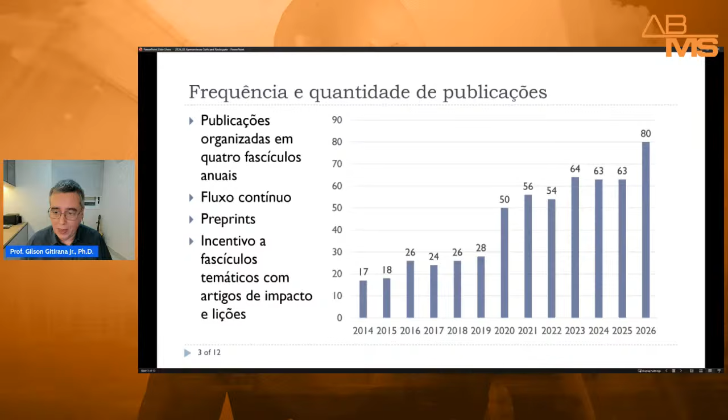E a revista tem incentivado a proposição de fascículos temáticos com artigos de impacto e sempre publicações de destaque, como as lectures tradicionais. Em termos de indexação, a Soils and Rocks tem indexação na Scopus, no Clarivate, na Web of Science, no Google Scholar, na CNKI, que é uma base de dados importante da China. Então, ela está presente nos principais indexadores.

Isso significa que não apenas a Soils and Rocks tem um fator de impacto quantificado. Significa também que quando um autor publica o seu artigo na Soils and Rocks e faz a citação a outros artigos de outras revistas, essas citações estão sendo registradas e estão aparecendo no fator de impacto das outras revistas e nos fatores H dos autores.

Então, é uma revista que está totalmente inserida na lógica de indexação e rastreabilidade das citações. Falando em como tem evoluído os índices da revista, primeiro, um motivo importante até dessa nossa apresentação hoje é celebrar a evolução em termos de qualis.

A Soils and Rocks tem uma classificação que evoluiu ainda no triênio, na época era triênio, 2010 a 2012. Ela estava na categoria B2, na área de engenharias 1, e B1 na área de geografia. No quadriênio de 13 a 16, ela subiu levemente para B1, que é o terceiro de 8 estratos no sistema daquela época, que tinha A1, A2, e de B1 a B5. E aí no quadriênio seguinte, de 17 a 20, ela teve uma queda. Ela foi classificada na categoria B3, que era o quinto de 8 estratos.

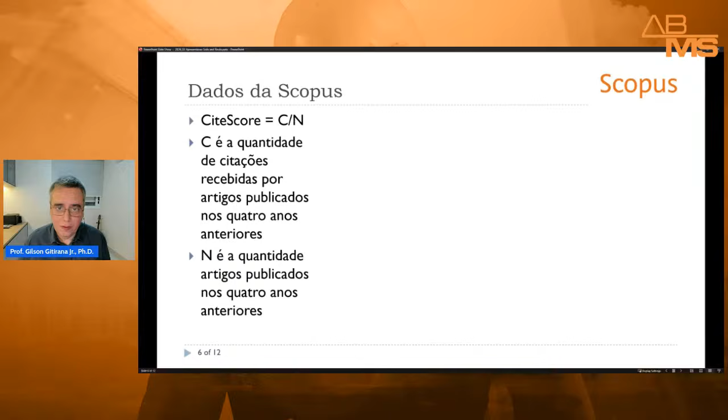Em termos de Scopus, o índice principal é o chamado CiteScore, que é o fator de impacto da Scopus. Esse gráfico mostra como o nosso fator de impacto tem evoluído. Então, a gente teve uma estagnação com fator de impacto realmente baixo até 2022, mas a partir de 23 nós conseguimos fazer esse número crescer. E isso se deve a uma série de modificações nos procedimentos da revista, buscando aperfeiçoamentos que trouxeram esse resultado.

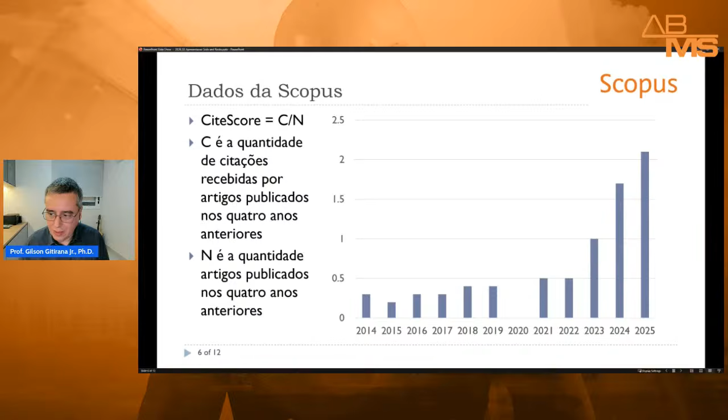Mas o que importa também não é só a evolução do fator de impacto, é a posição da revista quando você compara ela com as mesmas revistas da mesma categoria. No caso da Scopus, a categoria da Soils and Rocks tem o título Engenharia Geotécnica e Geologia de Engenharia.

Mostrando aqui a evolução recente nesses últimos 4 anos. A gente ainda não tem a divulgação final de 2025, mas a gente tem uma prévia. Em 22, a revista estava no 12º percentil, o que certamente era muito aquém do desejado. O percentil da revista é modesto ainda, mas ele tem subido bastante. Então, ele foi ao 22º, 34º, e agora para 2025, com o fator de impacto subindo.

Lembrando, ele agora é previsto ser fechado em 2,1, a gente está com a expectativa de um percentil próximo de 40. Eu diria que internamente a nossa meta é atingir no curto prazo um percentil em torno de 50, que seria já uma evolução bastante importante para a Soils and Rocks.

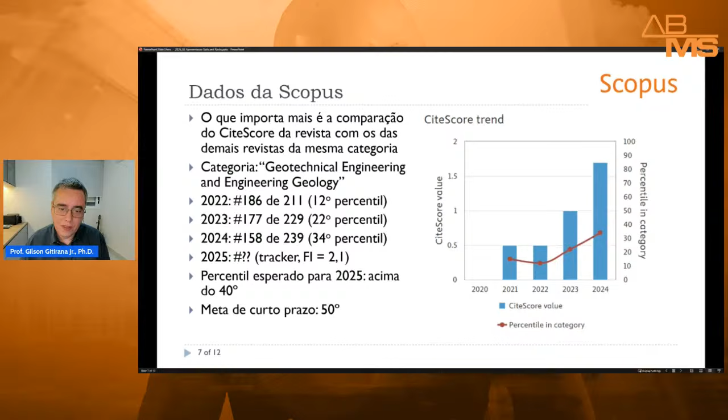Só conectando isso com Qualis, um percentil acima de 50 significa uma revista classificada como A4, independente dela ser nacional ou não. Então, uma revista que está no percentil 50 vira A3, nacional, porque ela está sendo valorizada por ser uma revista de uma associação nacional, ou por ser indexada no Scielo, entre outros critérios.

Falando de Web of Science, Clarivate, o fator de impacto é inferior ao da Scopus, mas também tem evoluído, com uma certa oscilação no índice JCR, como vocês estão vendo aí, de 22, 0,5, 23, 1,1, e 24 a gente oscilou para baixo, e a gente tem tentado diagnosticar e entender por que essa oscilação para baixo, sendo que a gente teve uma melhoria na Scopus, e a gente tem alguns indicativos sobre os motivos.

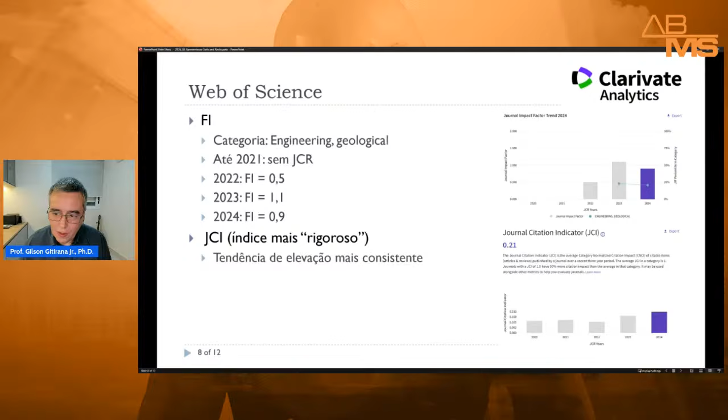O índice JCI, que é o índice que tende a substituir o fator de impacto dentro da Web of Science, porque é um fator mais rigoroso, com outros critérios, esse tem subido de uma maneira mais consistente. Então, ele atualmente está em 0,21, bastante aquém ainda do que a gente deseja, mas a gente tem conseguido fazer ele subir.

Em termos de número de submissões, a gente tem recebido um aumento, o que significa que a revista está despertando mais interesse dos autores. De 24 para 25, por exemplo, a gente teve um aumento de 77% na quantidade de submissões. Isso também se reflete na quantidade de artigos publicados pela revista.

Isso traz para a gente um grande desafio, porque uma quantidade grande de submissões significa muito mais trabalho em termos de conseguir pareceres de qualidade para os artigos, que vão nortear a decisão editorial sobre o aceite ou a rejeição do artigo.

Mesmo com essas dificuldades em quantidade crescente de artigos, a gente tem conseguido manter um tempo de avaliação relativamente curto, quando comparado com outras revistas da nossa área. O tempo médio de avaliação, primeira rodada, em 25, por exemplo, foi de 89 dias. Não é o ideal, o que a gente deseja é que seja mais curto, mas dentro de todo esse contexto de dificuldade de conseguir o trabalho voluntário dos nossos revisores, é o que nós temos conseguido. De maneira geral, ter uma primeira decisão, uma segunda depois de um artigo revisado, e uma decisão final, publicação, editoração, tudo fechando em 6 meses, a gente considera um prazo relativamente muito razoável, comparado com o que é típico dentre revistas semelhantes.

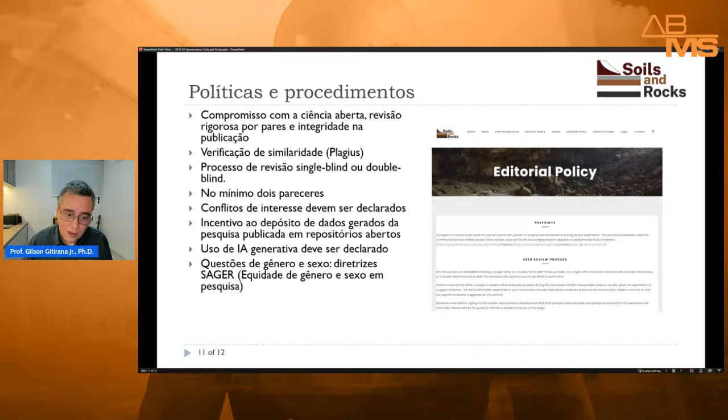Finalmente, observar que a revista também tem uma preocupação com questões de gênero, e segue as diretrizes SAGER de equidade de gênero e sexo em pesquisa. É um grande desafio que nós temos, mas temos tentado ter uma representatividade mais equânime possível, dentro do possível.

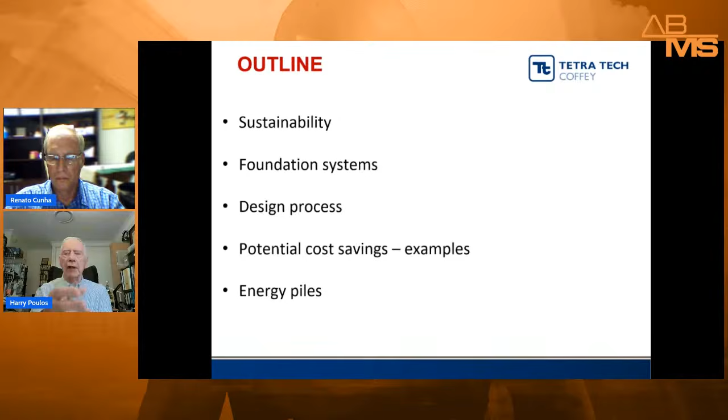I will talk firstly about what sustainability is. Then I'll say something briefly about foundation systems oriented towards sustainability, and about the process of design, and about cost savings because of the focus on sustainability. I'm going to finish up with that of energy piles.

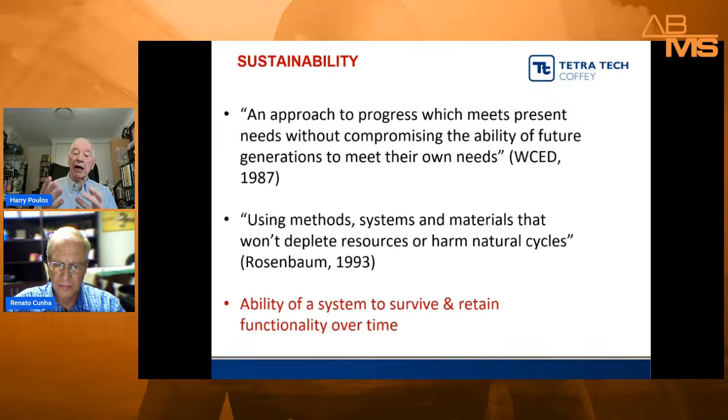Sustainability meets present needs without compromising the ability of future generations to meet their own needs. Another definition is using methods, systems, and materials that won't deplete resources or harm natural cycles. But basically, putting it in simple words, sustainability is the ability of a system to retain its functions over time.

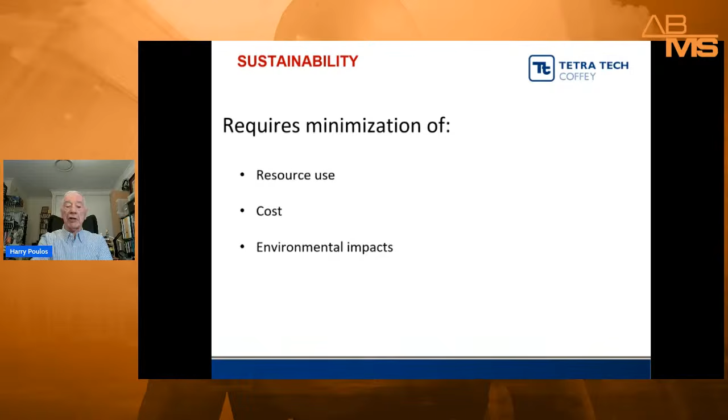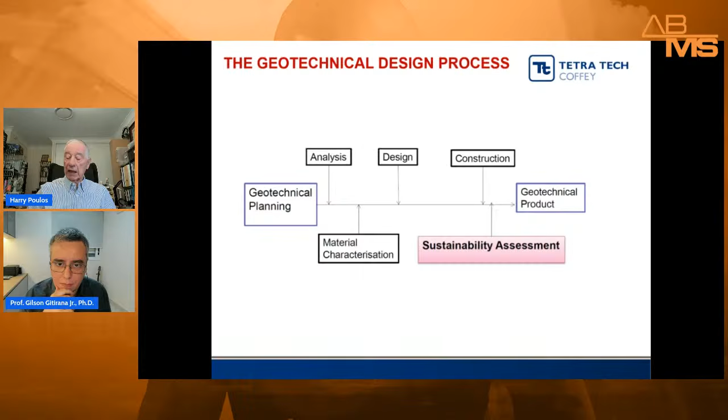I'm sorry to interrupt, but we are having some technical difficulties. Your sound has a connection problem, not feedback, since the same artifact persists. I wonder if we could try reconnecting, because it's really difficult to understand what you're saying. The sound was working fine just before, so it's probably a connection issue. I'm going to try going through a headpiece and microphone, or connecting directly, to see if that improves things.

Okay, now it's muted. Sorry, I didn't look at it. So based on your camera, I see there's a lag. It's slow internet for some reason, because you are skipping some frames.

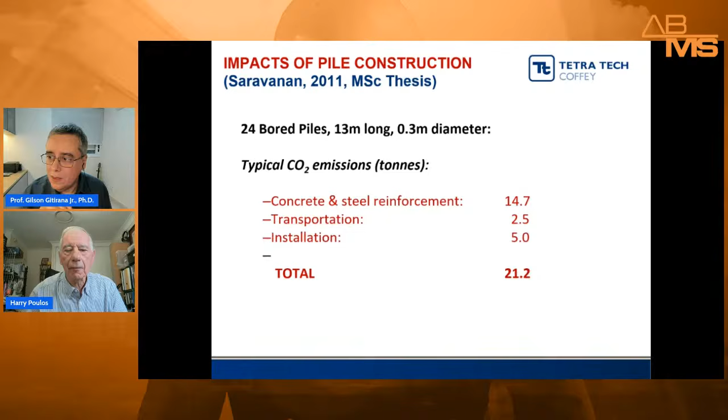So I wonder if we could try reconnecting, just to see if it fixes. Let me see if I can do that. This probably requires technology. I'll do my best. Yeah, I don't know what you did, but it's good now.

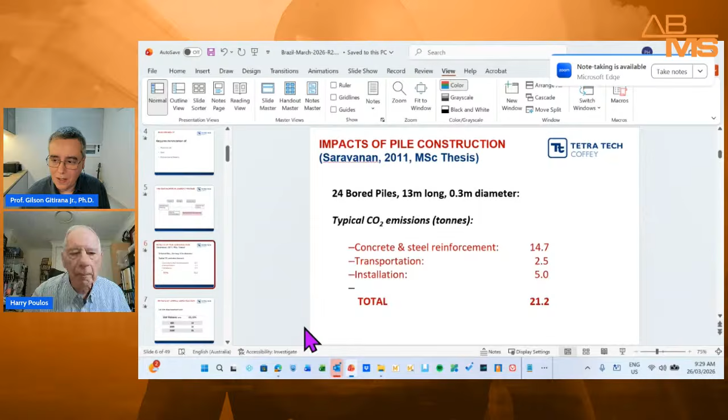Do you want me to reconnect? What do you guys think, Renato? Can you hear Professor Poulos well now? I think it's better now. I don't know what he did. I thought the problem was in my computer, but I noticed others had it too. Yeah, now it's better. I think it's normal now.

I think we can continue. Unfortunately, Professor Poulos, we will have to restart because since the beginning the sound was lagging and crashing. We couldn't understand anything. We waited a little bit to see if it improved, but it didn't. But I think it's good now.

Perhaps if you turn off your camera, it would improve. But let's start with the camera on. Let's see how it goes.

Can you say something again so we can check? Is this better? Sound is good, sound is good. We can resume, I think. Can you hear me better now? Yes, we can. So Juan, can we resume? All right, well, I apologize.

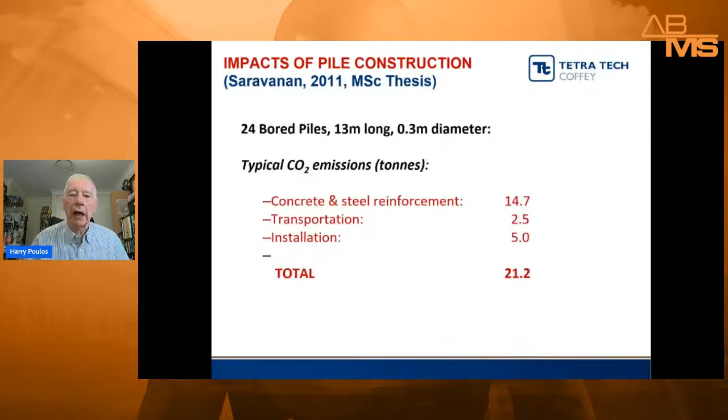Obviously these technical issues do tend to create problems. Let us resume then. There was an interesting thesis by a gentleman called Saravanan a few years ago that looked at the impacts of pile construction in relation to the emission of carbon dioxide.

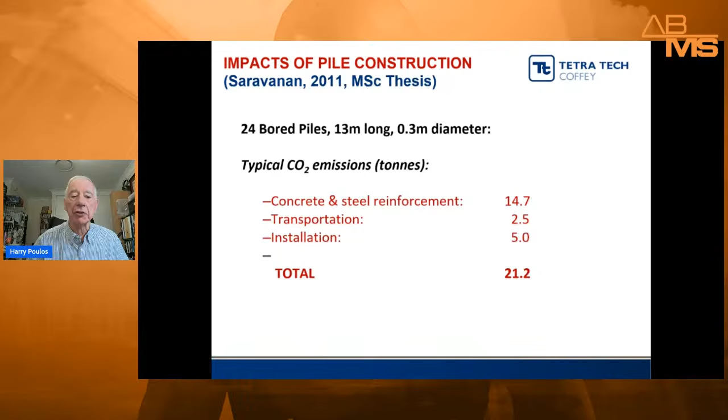He took an example of 24 bored piles, 13 meters long and 0.3 meters diameter, so quite small piles, but he worked out that the construction of these bored piles caused an emission of 21.2 tons of CO2. So even with a relatively small foundation system, and relatively small piles, there was a substantial emission of carbon dioxide in constructing and installing these piles.

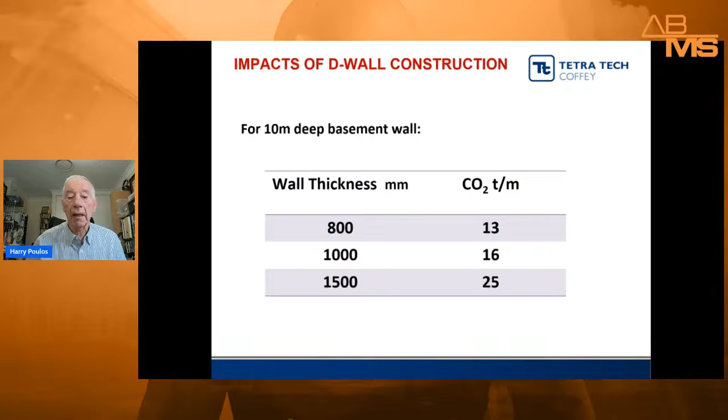He went on—I won't dwell on these—but there are some guidelines in terms of the impacts of diaphragm wall construction, showing for a 10-meter deep basement wall how much carbon dioxide is involved for wall thicknesses of 800, 1,000, and 1,500 millimeters. He worked out that for each cubic meter of concrete we could save, we saved 0.46 tons of carbon dioxide. And importantly, for each ton of reinforcing steel, we saved 1.77 tons of carbon dioxide.

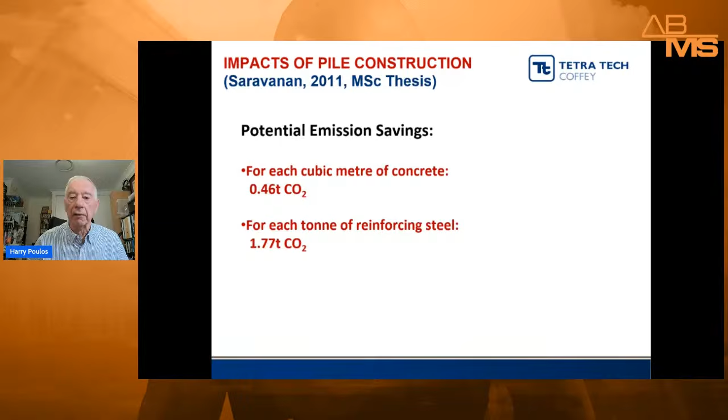So in these days, when we're trying to reduce environmental impacts and carbon development, saving these amounts of carbon in our foundation construction has to help. What Saravanan concluded was that there were a number of practices in piling that could assist sustainability: adequate geotechnical investigation, efficient pile design, selecting the appropriate pile type, using combined pile-raft foundations, using sustainable materials, testing of piles, and also the multi-use of piles—using them not only for carrying loads, but also for generating energy.

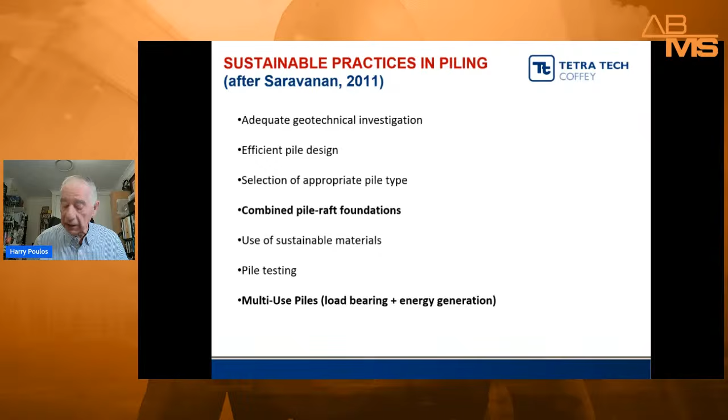Some of the practical steps towards sustainability: we need to minimize the use of concrete and construction time. Importantly, we need to take a more modern approach to design and focus on settlement-based design rather than capacity, because in many of the high-rise projects I've been involved with, the governing factor in design is not really capacity, but settlement and differential settlement.

Another thing we can do is try to locate piles in the foundation system in the optimum location, concentrating piles below heavily loaded areas and having fewer, shorter, or even no piles below more lightly loaded areas. That helps reduce the requirements for raft thickness, which of course means less concrete and less reinforcing steel.

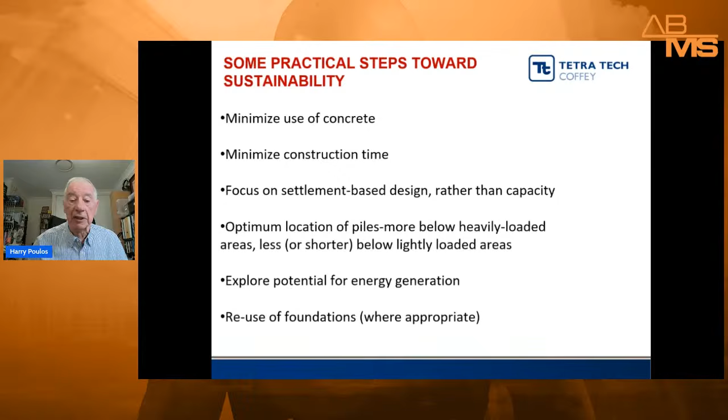We can also explore the potential of piles for energy generation, and importantly—something being done in many urban areas these days—we can reuse foundations, either on an existing building by making it taller and assessing whether the existing foundation system is adequate, or increasing the foundation system using the existing piles as the basis for doing that.

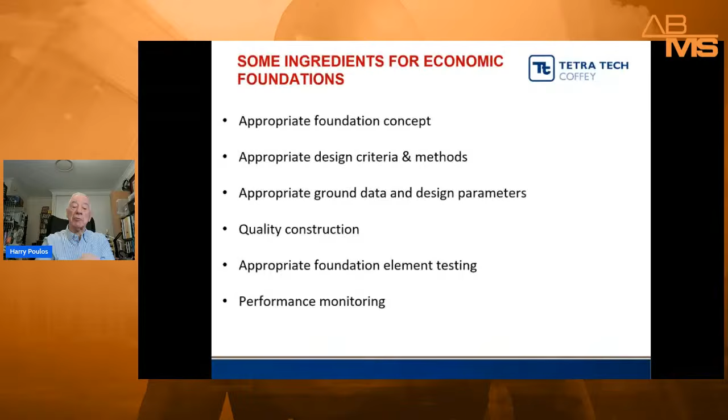So some of the ingredients for economic foundations: we need the right concept, the right design criteria and methods, the right data and design parameters, quality construction, foundation element testing, which generally means pile testing, and importantly, performance monitoring, because we need to verify that our design processes are not dangerous or over conservative.

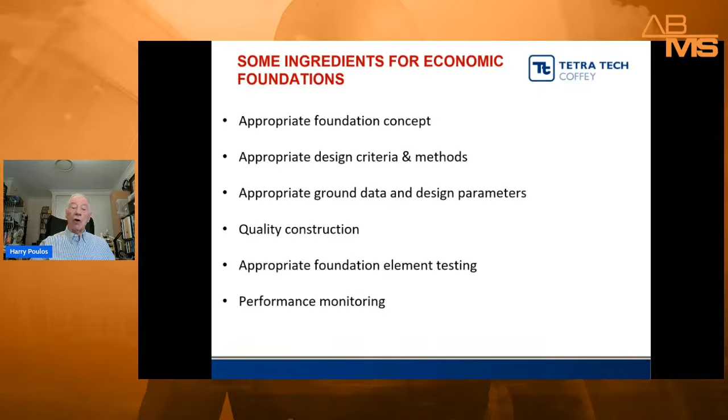The foundation systems we usually deal with are one of three types: raft or mat foundations, fully piled foundations, and piled raft systems, where almost inevitably the basement slab or raft is used as a load-bearing and settlement-reducing element, which can lead to significant economy.

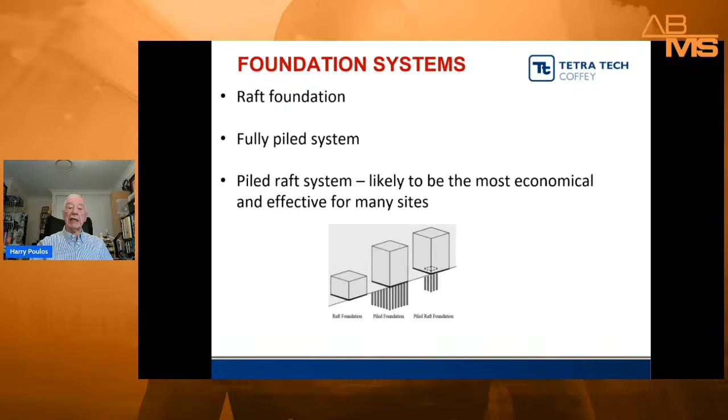There were some interesting foresights on piles and pile rafts that go back to 1957, with tests Whitaker did in the UK. Each of these diagrams shows small model rafts, square rafts, 50 and 76 millimeters in size. The vertical axis shows settlement as a percentage of breadth, and the horizontal axis shows the number of piles. The important thing we see, which matters from a practical viewpoint, is that once you get beyond a certain number of piles - in the top diagram that's 3 squared or 9 piles, and in the bottom raft some 16 or so piles...

Once you reach a certain number of piles, the foundation system actually acts as a block, and increasing the number of piles has very little effect on foundation performance. So if we put in a whole lot of piles, we're really wasting money, wasting resources, and not being sustainable.

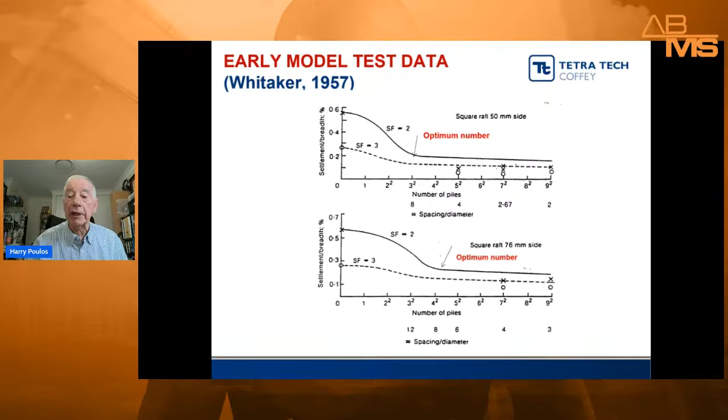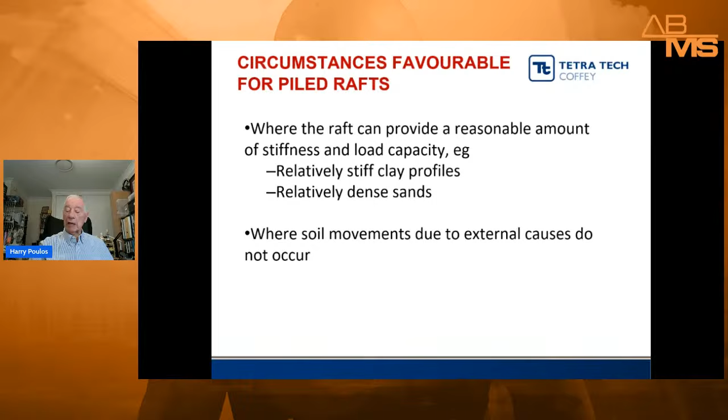Pile rafts can be used in a number of circumstances. They are not a universal solution, but they are often a good one, useful where the raft can provide a reasonable amount of stiffness and load capacity. For example, relatively stiff clay profiles, as in Frankfurt, Germany, or relatively dense sands, and also where soil movements due to external causes, such as groundwater withdrawal, do not occur.

So if you have these circumstances, piled rafts may well be a useful option to pursue. The foundation process itself has a key aspect: site characterization. We need to understand the geology, define the stratigraphy, and quantify the relevant geotechnical parameters, generally through in situ testing, laboratory testing, and load testing.

In recent years, there's been a tendency to include measurements of shear wave velocity with depth in our in situ investigations. The beauty of this is that shear wave velocity is actually a direct measure of the stiffness of the ground, providing us with a basis for doing better settlement estimates than in previous years. I'm a great fan of shear wave velocity measurements, and I always specify that we need tests to define the variation of shear wave velocity with depth.

The design issues, which I won't go into in detail but just list: obviously ultimate capacity has to be satisfied, settlement and differential settlement and tilt, the response of the foundation to lateral loads and moments, dynamic behavior, earthquake response, and from a structural viewpoint, the foundation elements must be designed to be structurally strong and adequate. Importantly, durability is also an issue, particularly with many tall buildings where we expect a life of 40 or 50 years or more.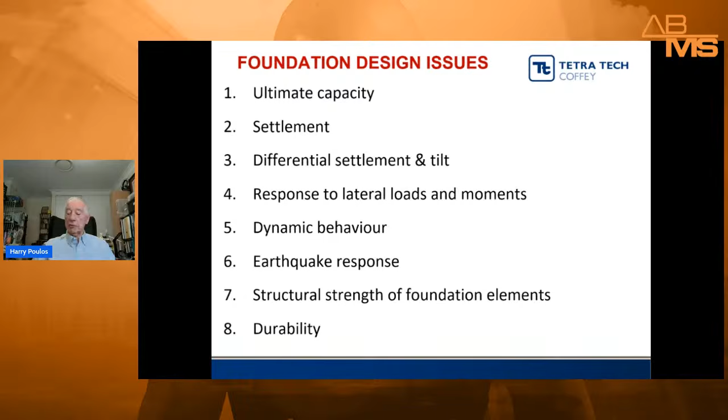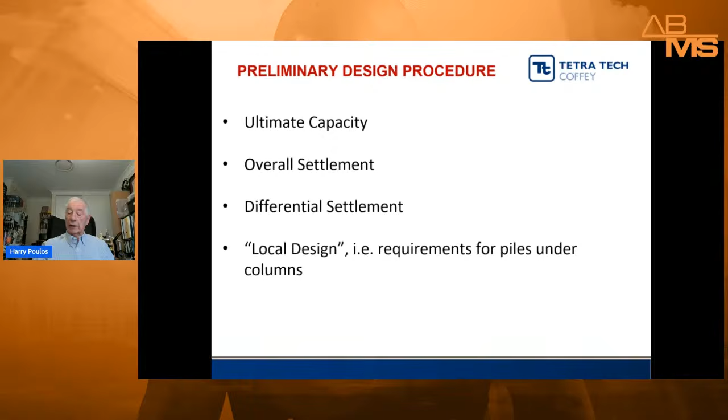Durability becomes an important issue. Normally we do two or three stages of design. We have a simple preliminary design procedure where we estimate the ultimate capacity, the settlement, the differential settlement. We also look at local design, the requirements for the raft and piles carrying column loads under the raft, making use of a simple theory using Randolph's expressions to give us an idea of the load sharing between the raft and the piles.

What we can do with this is use simple hand calculations or computer methods. I use a program called MathCAD to do this, but it's very quick.

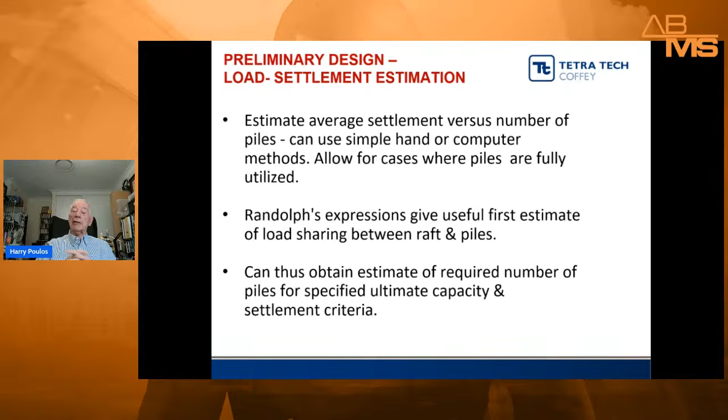What we can do is look at the effect of the number of piles below a particular raft and see how the capacity and settlement vary with increasing numbers of piles. We can construct a trilinear load settlement curve with three portions.

The first, from the origin to point A, is where the whole system behaves more or less elastically. The second, from A to B, is where the piles have been fully mobilized, so they're still carrying load, but any additional load is carried by the raft. Then we have the third stage where we reach the ultimate capacity.

In general, we want to be somewhere around this area, where we're making good use of the piles and getting them quite highly loaded, but we satisfy both capacity and settlement criteria.

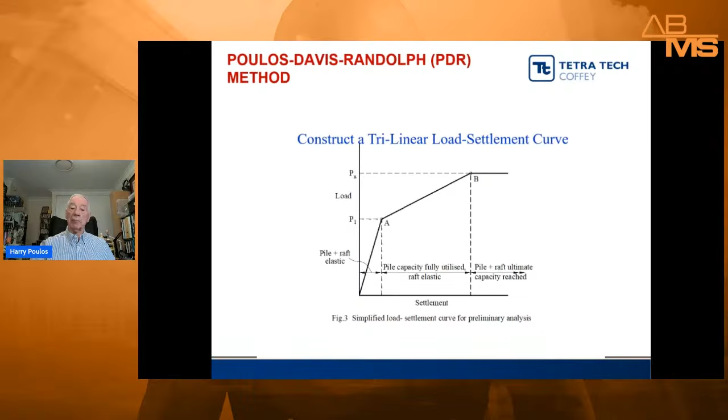In the same way, the right-hand diagram shows settlement versus the number of piles. As we increase the number of piles, the settlement reduces from the raft-only value of nearly 70 millimeters. Once we get to about 20 piles, we have a settlement around 25 millimeters. Going beyond that, however, has no additional benefit in settlement.

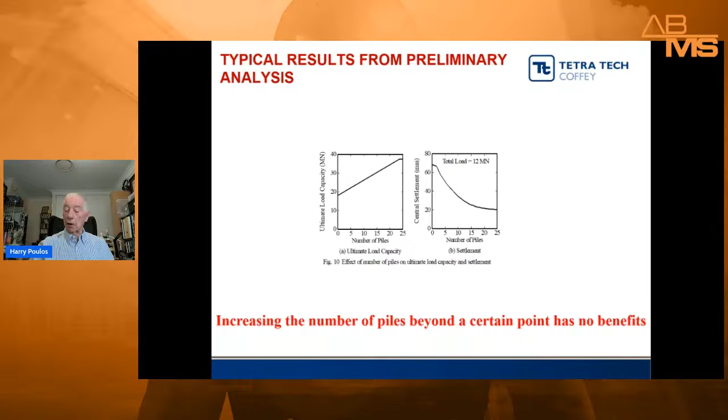So you can see that by doing this sort of simple calculation, we can home in on what may be a sustainable and optimum design.

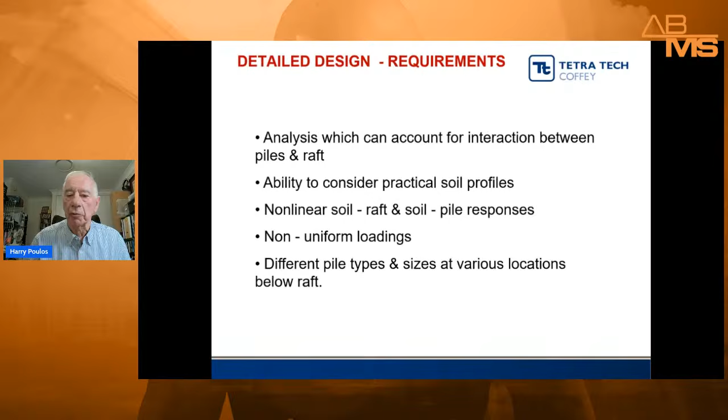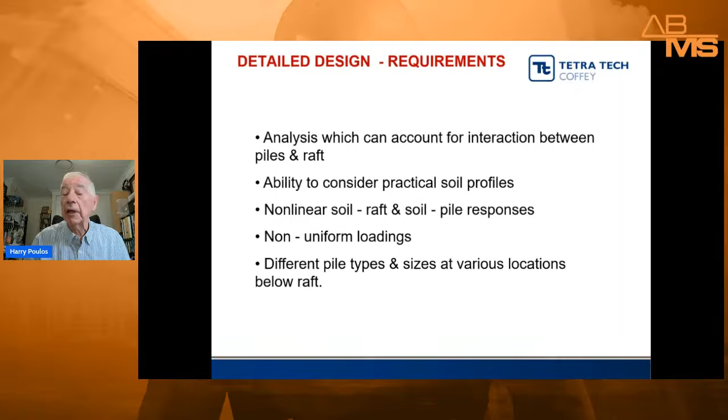Once we've got that, we need to do a detailed design and make sure we have all the details correct. So we need an analysis that can take account of interaction between the piles and the raft, consider practical soil profiles rather than super simple ones, allow for non-linear behavior of the soil, the raft, and the soil-pile system, cope with non-uniform loadings, and ideally consider different pile types and sizes at different locations below the raft.

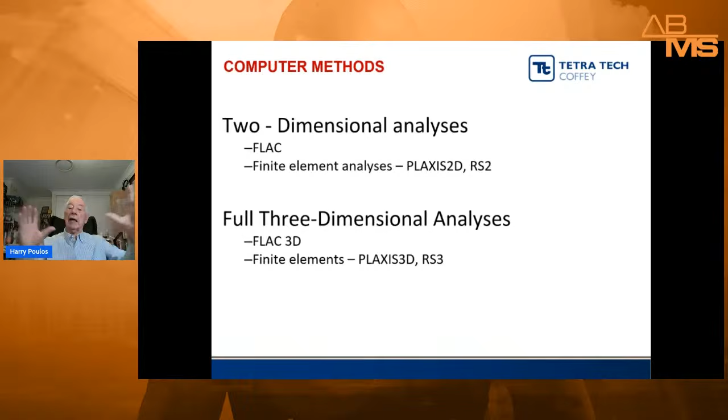Generally these days we have powerful finite element and finite difference methods. Two-dimensional analyses used to be used, but now it's quite common for fully three-dimensional analyses, such as FLAC 3D, or in finite elements, Plaxis 3D, or the program RS3 from Rocscience. All of these enable us to do a detailed design and refine the original simple design from stage one.

I want to now briefly describe three cases where we managed to use some sort of analysis and design approaches to reduce the piling requirements.

The first of these is the Emirates Twin Towers in Dubai, for which we did the foundation design. Here they are in construction and finished.

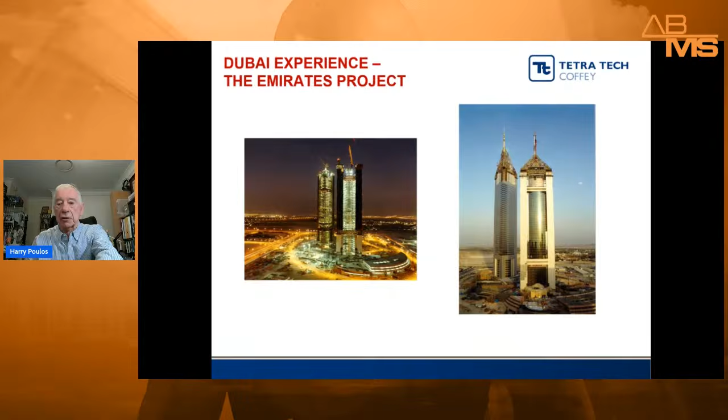From these tests, we found that we were somewhat conservative with our prediction of capacity. The piles performed rather better. They settled a little less than we predicted, but not much.

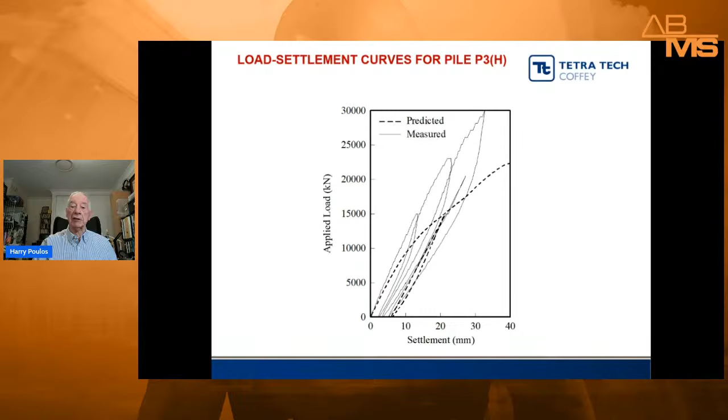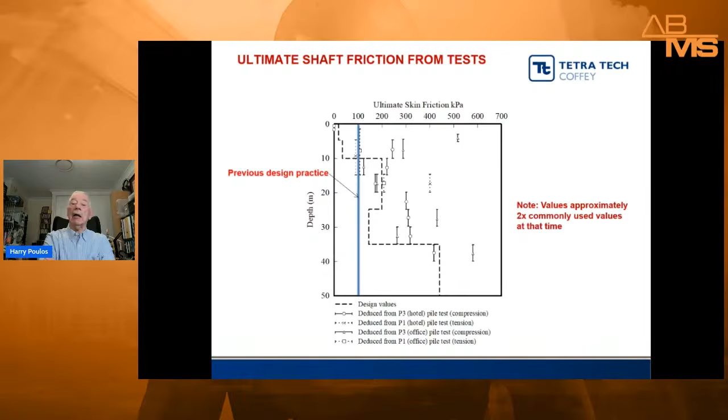Importantly, when we put all the results together, this plot shows the ultimate skin friction measured from the instrumented pile load tests versus depth. There's quite a variation in the tests, but I've shown here what used to be the design practice in Dubai on projects prior to the Emirates, which restricted skin friction to 100 kilopascals. We found that we could actually use, particularly deeper down, skin friction values 2 or more times larger than that previous design practice.

So the piles were fewer in number and shorter than if we'd designed on a conventional basis. The foundation performance was actually a lot better than we predicted. Though the term sustainability was not in use in the late 1990s when this project was undertaken, the design contributed to sustainability because of the methods of pile design, advanced laboratory testing, and verification via pile load tests, which led to the use of less concrete and less reinforcing steel.

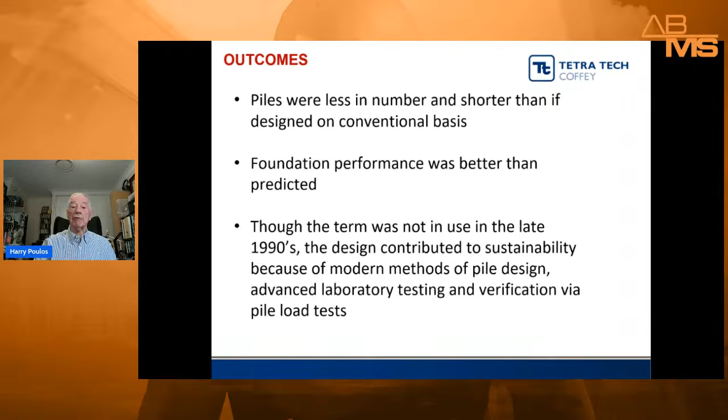The second case I want to describe, and it's not one of mine, but it's a case coming out of Italy by Mandolini and his colleagues. This involved an examination of twin towers in Naples, which had been designed as fully piled foundations with no allowance for the raft. You can see the buildings here, and in plan, a large number of piles.

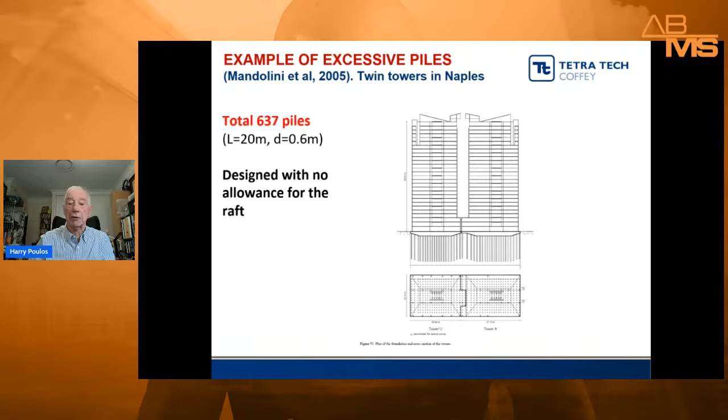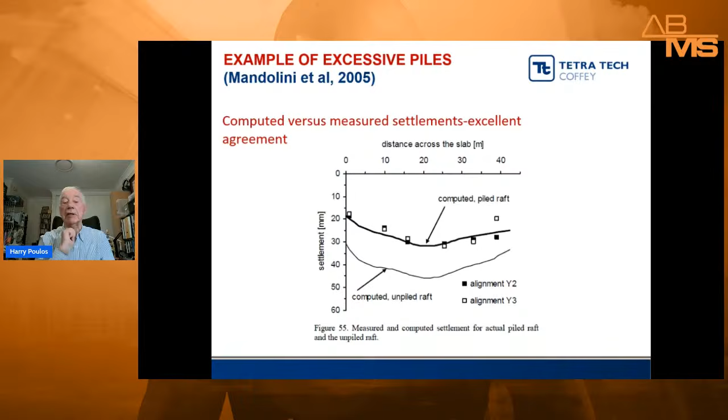In fact, a total of 637 piles in this foundation system, length 20 meters and diameter 0.6 meters. Mandolini calculated what the settlement of this foundation system would be. There were, fortunately, measurements of settlement. In this diagram, this is the distance across the foundation slab, and this is settlement. He was able to get a very good match between what he calculated for the piled raft and what was measured. This other diagram simply shows what the settlement would be if you used a raft without piles.

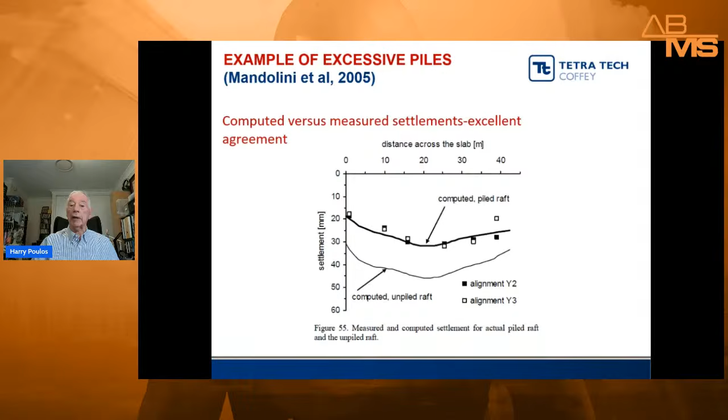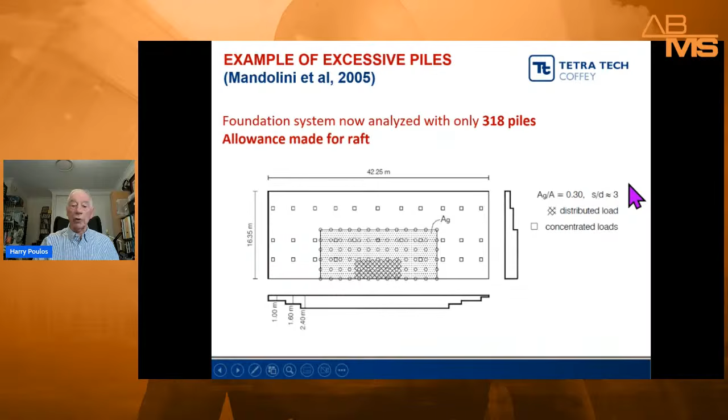Mandolini and his colleagues said there seemed to be too many piles here because they hadn't taken account of the raft, and there were probably too many piles anyway. So they did an alternative calculation where they used, instead of 637, half of that, 318 piles, with an allowance made for the raft. So there were only half the number of piles with the same raft. What they found was, interestingly, that the calculated settlement with 318 piles was 33 millimeters compared with 30 millimeters for the 637 piles. So those extra piles only led to a reduction in settlement of 3 millimeters.

Also, the maximum differential settlement was improved and reduced by 10%. The total piling length actually used was 12.7 kilometers, whereas the total length that could have been used was 6.3 kilometers. So there would have been very similar foundation behavior with 50% savings on the pilings, and therefore greatly enhanced sustainability.

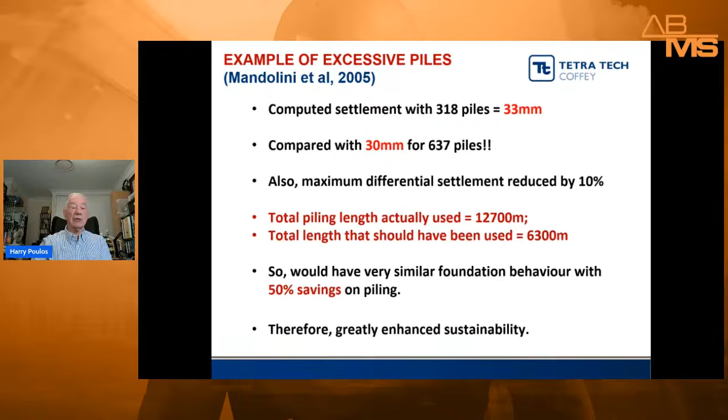The third case is one that, again, I was involved with - a high-rise tower on the Gold Coast in Queensland, Australia, called Artique, a 28-story residential building. The structural designer had designed a fully piled system to rock, and the piling contractor thought it may be possible to reduce the piling requirements, so he engaged us to look at the feasibility of designing it as a pile raft, because the structural engineer hadn't taken any account of the raft.

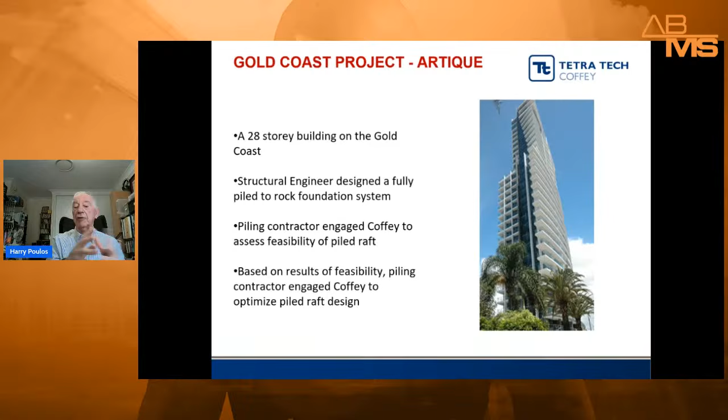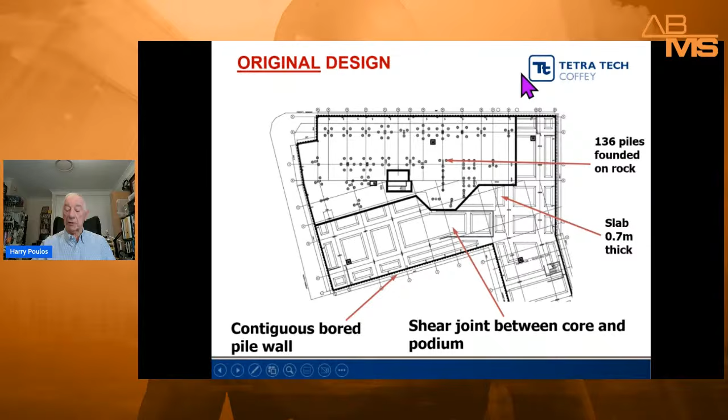Based on the results of that feasibility test, we came up with an alternative design for the contractor. Here is a plan of the building - there's a bored pile wall around here, 136 piles in the original design, and a slab 0.7 meters thick. Here is the ground profile - I won't spend too much time on this, but there was reasonable sand fairly close to the surface, so the ground conditions were quite favorable for a pile raft.

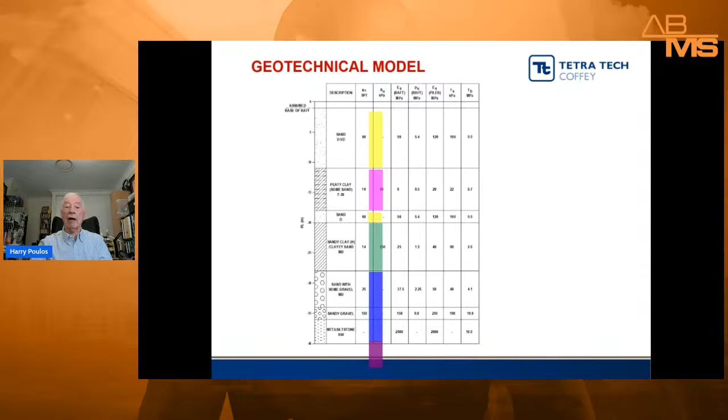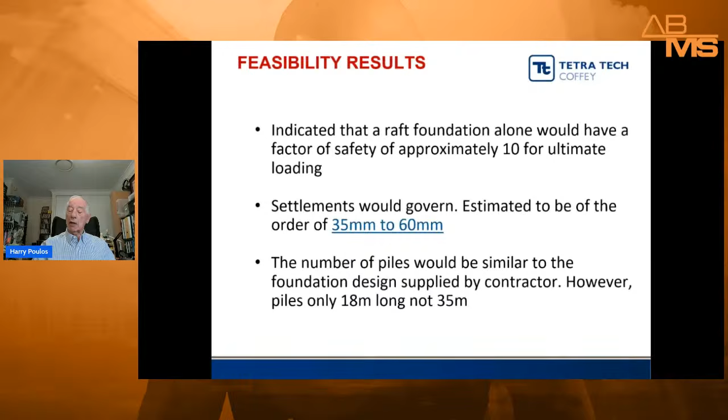We went ahead and did a design, and in our feasibility study, we found that the raft foundation alone would have had a factor of safety of almost 10 for ultimate loading. So from a capacity viewpoint, we didn't need any piles, but the settlements would in fact have governed, because we estimated the settlements to be between 35 and 60 millimeters, a maximum of about 60 millimeters with a raft only. But what we found was that the number of piles could be similar to what was used by the contractor, but importantly, we could use piles that were only 18 meters long, ending in a fairly dense layer, rather than 35 meters long going right down to rock.

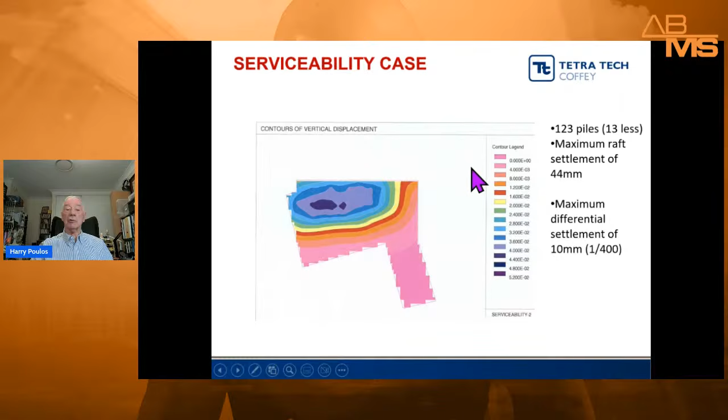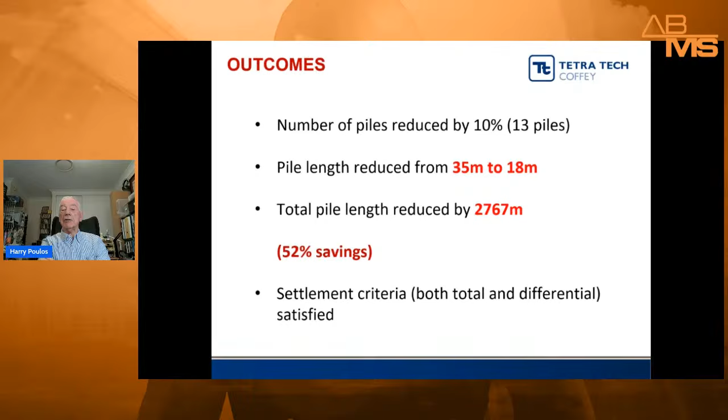This is a diagram of a program we used to look at the distribution of settlement, and you can see maximum settlements here. In fact, the maximum settlement we got was 44 millimeters, and a maximum differential settlement of 1 in 400, which satisfied the design criteria. Because of this re-evaluation of the foundation system, we had a reduction of 13 piles, so 10% fewer piles. The length was halved, and the total pile length was reduced by almost 2.8 kilometers, which resulted in a 52% savings in the foundation costs, and the settlement criteria were satisfied.

Now, finally, in my last few slides, I just want to say a little bit about energy piles. An energy pile is a pile that uses the thermal capacity of the ground around the pile to store heat.

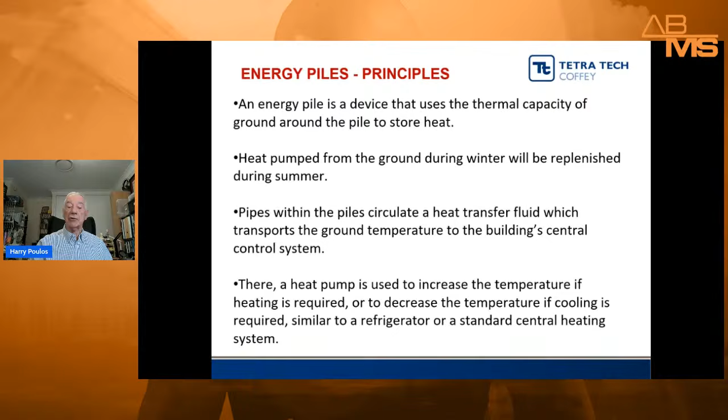There are a number of references on energy piles. Professor Heinz Brandl devoted his Rankine Lecture in 2006 to this topic, a very comprehensive paper. There's also been interest in Brazil, from Professor Cunha and his colleagues, and a whole issue of Soils and Rocks in 2022 was devoted to thermal applications in geotechnical engineering, including papers on energy piles. This is a technology that has emerged over the past two decades or so.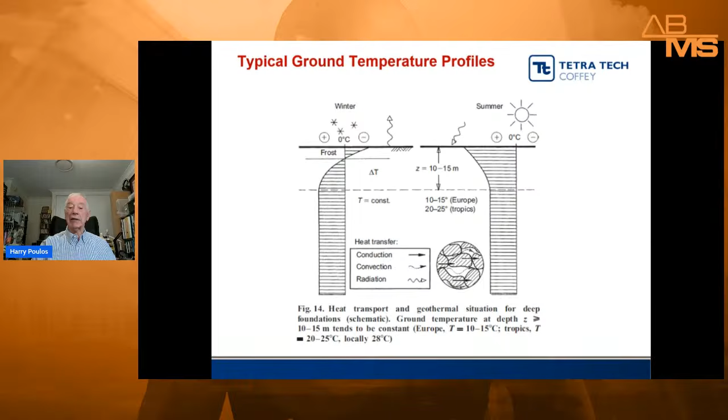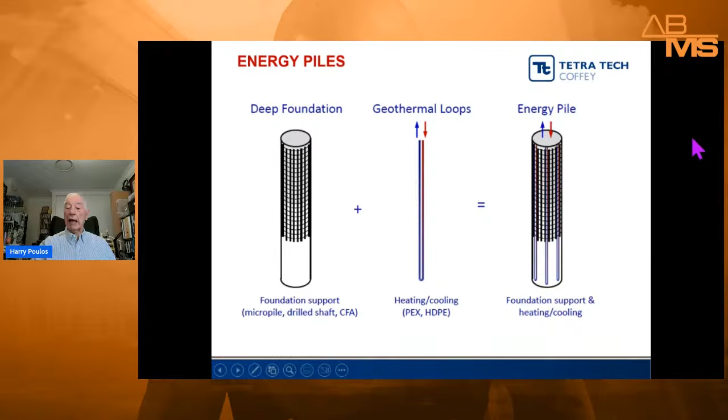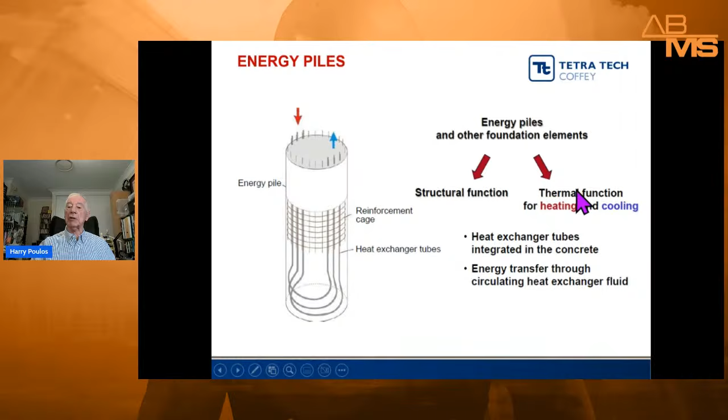Here's our normal deep foundation, which carries loads. What we add to that is a series of geothermal loops for heating and cooling. So you finish up with an energy pile which has both reinforcement and these loops. Here's another diagram showing how these loops work. They have a structural function and also a thermal function for heating and cooling.

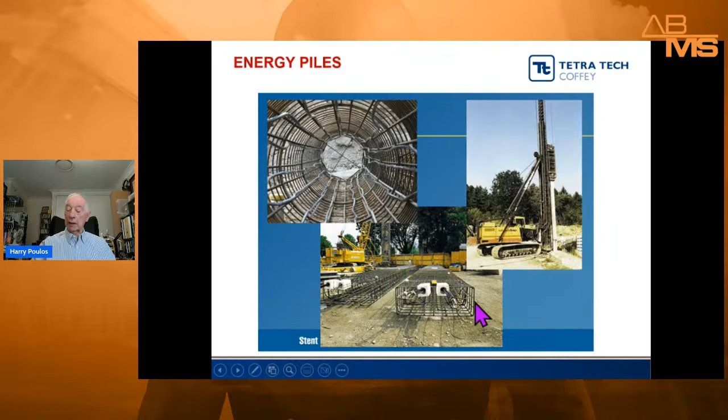This is what they actually look like. Here's a normal pile with both the reinforcement and the heat loops, and here is a barrette with the same pair, the reinforcement and the heating loops. Here is a diagrammatic representation of energy piles. Here are the piles. You have a heat exchanger, and then you pump up the air, hot or cool, depending on what the requirements are.

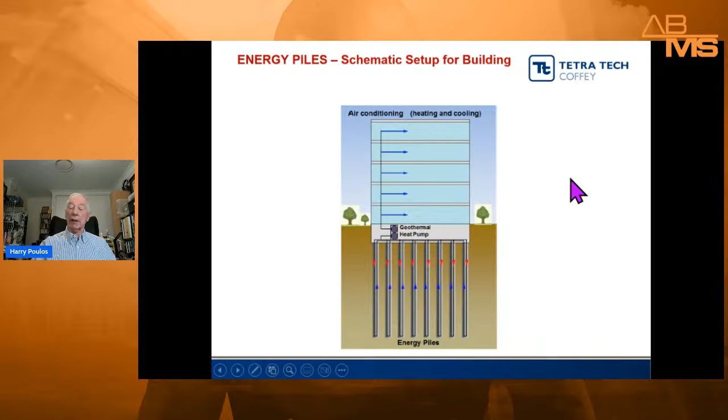The performance of energy piles depends on many site-specific factors such as soil type, particularly thermal conductivity, groundwater depth, and initial ground temperature. The best conditions are in saturated sands and clays, especially with groundwater flow. With the right ground conditions, you can get something like 25 watts per foot, or 0.3 meters, so about 80 watts per meter thermal yield from an energy pile.

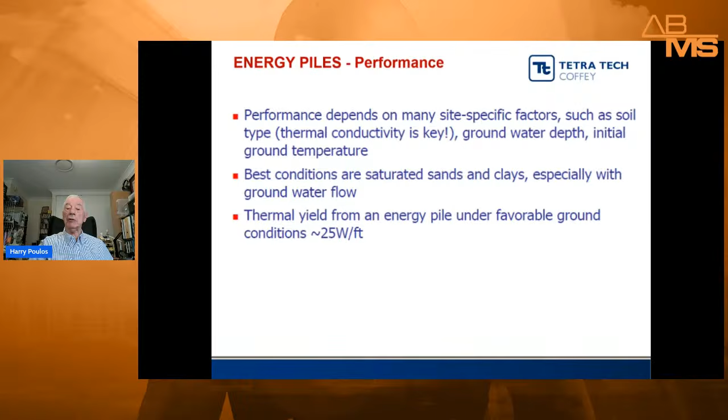In the design of piles that are also energy piles, we have to be aware that not only does the pile have to withstand the structural loads shown on the left-hand side, but there are also thermally induced stresses in the piles. If the ground is cooling, this tends to cause tension or a reduction in the compression stresses in the upper part of the pile. So your axial load distribution is rather less than it was, and in extreme cases you may even get tensile stresses.

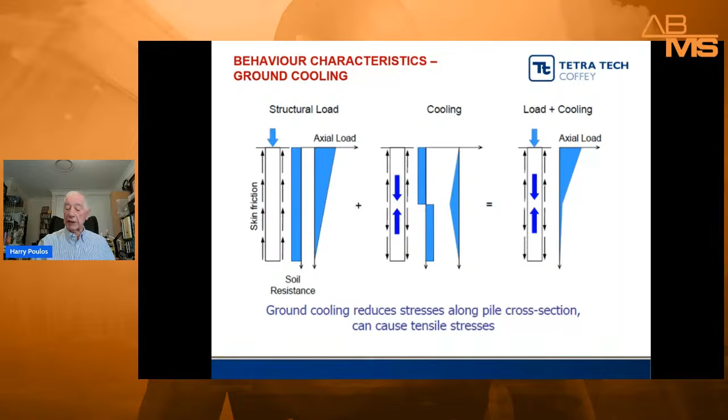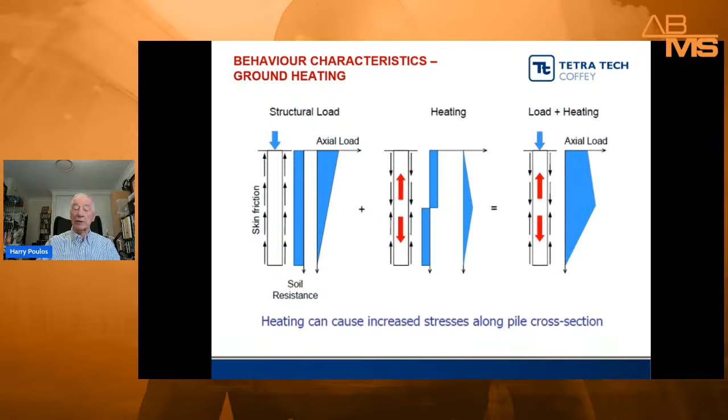If you have ground heating, then in the upper part of the pile you get additional compressive stresses. So if you look at the axial load versus depth distributions, you get something similar to a negative friction situation, where you get a maximum axial load or stress at some depth below the ground surface. That needs to be checked in the actual design to make sure the pile is structurally able to cope with those stresses.

If we summarize the advantages of energy piles: it uses the building substructure, so it's there already. There are significantly decreased costs in energy generation, and it doesn't require any additional land. The disadvantages are it may not, depending on the ground conditions, offer optimal conduction.

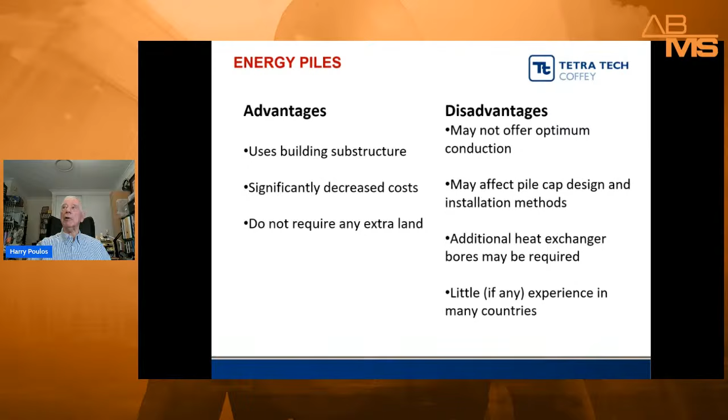It may require a modification of pile cap design and installation methods. You may need additional heat exchanger bores, and there isn't a great deal of experience in many countries, although in Europe, and certainly in Austria where Professor Brandl is from, it has been used now for quite a number of years, and I think in the UK as well. So it is something well worth considering in these days of increased energy costs.

There is an example that I was provided by Professor Katzenbach in Germany with the Frankfurt Main Tower, which shows that in this tower there were 223 energy piles that were installed.

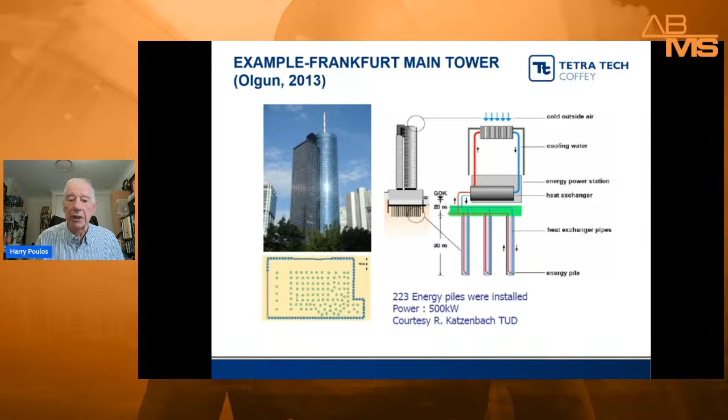They provided 500 kilowatts of power, which was pretty much what they required for the operation of that building. So you can see that there are real examples of where the use of energy piles can be beneficial financially and sustainability-wise.

So in conclusion, I would say that sustainability and economy go hand in hand, that thorough ground investigation, rational design, and foundation pile testing contribute to both of these. If we use less piles, then we use less concrete and less reinforcement, and that reduces our carbon footprint.

Piled rafts, in the right circumstances, have been found to be economic and effective foundation systems in many parts of the world, and we now have quite systematic design processes for these foundation systems. And in suitable circumstances, energy piles can significantly reduce heating and cooling costs and carbon emissions.

And finally, this is a plea to those people that do these sorts of building developments. Monitoring, I think, is very important, not only to verify that our design and the foundation performance is in line with what we expect, but also to verify that we can appropriately design foundations that are sustainable as well as being functional.